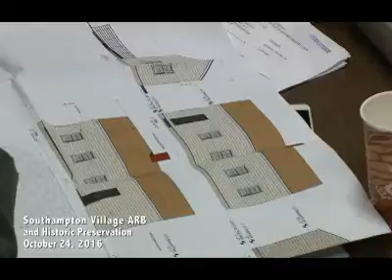It does not conform to current zoning. So we're looking to go before the ZBA on the 17th of November to address variances for, I believe it's 116 11.1, which has to do with the setback from the front of the property. The existing structure was built 3 feet 3 inches closer to the road than it would to conform to current zoning. So we're going to seek relief for that.

And the second thing we're seeking relief for is 116, I think it's 11.0, which has to do with the gross floor area because it's such a small building. But this indeed was the primary structure. This was the house. None of that gets grandfathered, huh?

We're just trying to dot the I's and cross the T's. You know, I have my own opinion about what you just said, and I would agree with you. Bo doesn't look like he would agree with that. It sort of morphed into a bigger house over the years, and when it was demolished, it wasn't 600 feet. It was a larger one.

Much larger. So if you want to go back to the original, I think the minimum for the gross floor area is 800 square feet. Yes, it is. So it's actually below the minimum. That's what the issue is. But the structure that was demolished conformed to the minimum. Yes, it did. And it was always the primary residence. It was not a secondary residence or secondary structure.

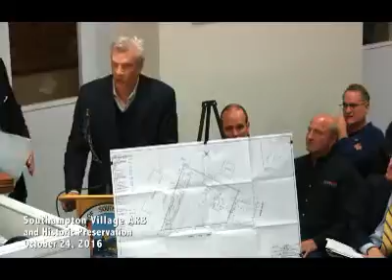Proceed. Good evening, board members. Wayne Bruyn, O'Shea, Marcincuk & Bruyn, Southampton, New York, on behalf of the applicant, Hamptons HDA LLC. With us in the audience is August Dorenzo and James Dorenzo, the principals of the company. We also have Michael Mineta, our architect, who will make a presentation for you, Joe Lombardi of the Raynor Group, who is our site engineer, and Steve Narada of Aris Design.

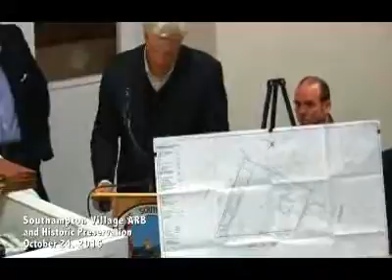The property in question is 116 North Sea Road, on the corner of North Sea Road and Bowden Square. It's a 1-acre lot. In 2014, an updated certificate of occupancy was issued, and the survey is right here. Existing conditions: it is improved with a dwelling. The certificate of occupancy issued to our client upon his purchase shows the property improved with a 2-story, 2-family dwelling, a valid pre-existing non-conforming accessory barn with business retail use, and two accessory sheds, with approved parking on site.

I can just point that out. This portion right here, the shaded portion on the northerly part of the property, this is Schmidt's on North Sea Road, Bowden Square, and the existing dwelling.

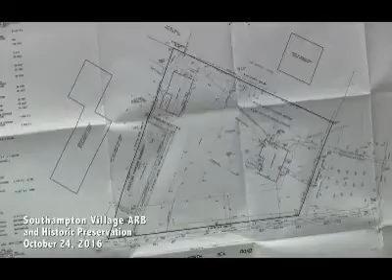We're here tonight for a preliminary discussion and to get this board's input on a preliminary basis. We've been to the planning board — in June we had our pre-submission there, and the planning board issued a report and some design guidelines that we need to address. One of the issues they asked us to look at specifically is the historic significance of the existing structures on the site, and whether they are contributing structures in the district. As you know, we are within the historic district.

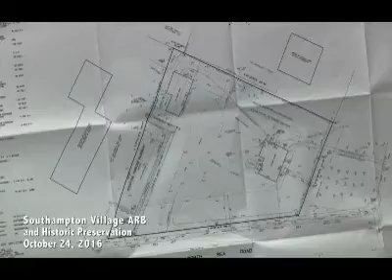Front along Bowden Square, all sides, details, and so forth — we've taken that into account. In studying the building architecturally and in terms of planning, we can go over the details, but the building itself — we wanted it to fit in architecturally and to be an iconic piece of the architecture of Southampton.

We looked at probably one of your best buildings within the town, the Southampton Historical Museum, Rogers Mansion. We looked at some of the elements there — two-story buildings, flat roofs, detail, octagonal additions, balustrades, and so forth — and considered how we could use that within our design while keeping the existing architecture intact.

With that said, this is the initial sketch of the feeling of the house — how it would be restored and how it would be added to. You can just barely start to see the additions in the rear, so from Bowden Square it will feel very much in keeping with what it is today. The house itself, or the new structure, will screen the parking areas in the rear.

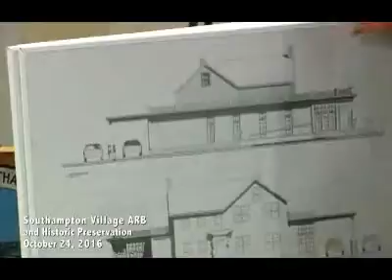Front and rear elevations: the house is kept intact, with the cupola on top as the main architectural detail besides its double-hung windows, and all chimneys kept intact. There's an addition to the left rear, and an addition to the right rear with a drive-up window. The main entrance to the new structure now comes off of North Sea Road, while the front entrance will only be used as an emergency access from inside.

So to be clear, the cars are going through a drive-in window and an ATM? Yes. No, I just want to make sure that what I'm seeing is what I'm seeing. Yes, there's an ATM lobby and a drive-up window and a drive-up ATM on the east side of the plan.

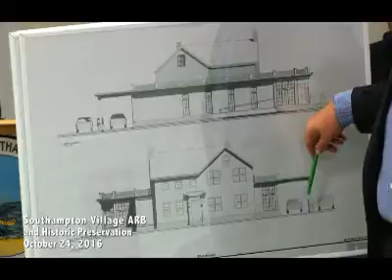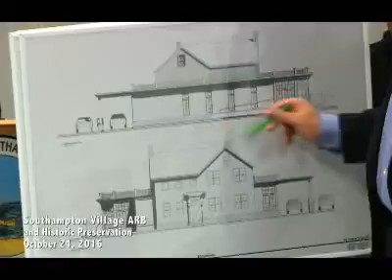The rear of the building, there is no rear of the building. We're looking at this as being a four-sided piece of architecture and not a blank slate in the rear of the building. So this is important to us, details, and so forth and so on.

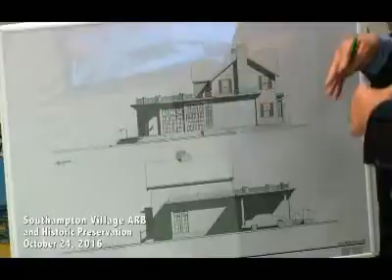When you talked about North Sea Road in the way of elevation, running out of space on this, this is what you'd see from North Sea Road. So basically the house is kept intact. In front of this is what's protruding in the rear is the entrance to the new proposed bank branch, and a similar octagonal element that you see on the museum which was a sunroom on the museum, with the balustrades and the details and the segmenting of the pilasters around that element.

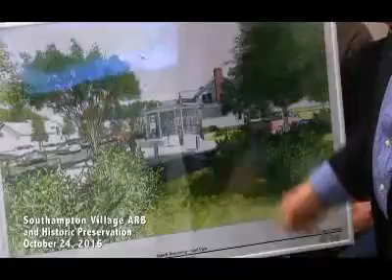That sketch, I'm running out of space, that you just questioned was of what you would see from North Sea Road, here. Thank you. And you can see the house, the existing house in the background preserved, and the addition, the parking, the barn, and in that packet we have landscape plans, we have material boards at the end.

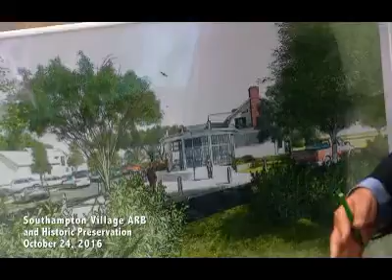We just realized that we'd be here an hour if we do everything in detail, so we really watered this down for the presentation. Any questions?

I'm going to reserve mine until I find out what we're looking at in terms of the original building, because that's going to... there is a plan that is. I can pull one out. As I was stating, it's going to guide my direction in terms of what you're proposing.

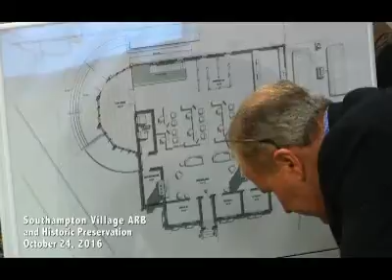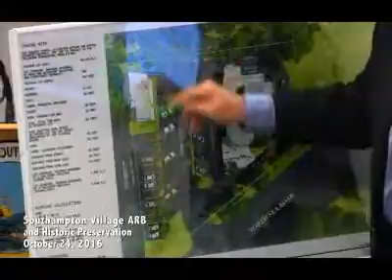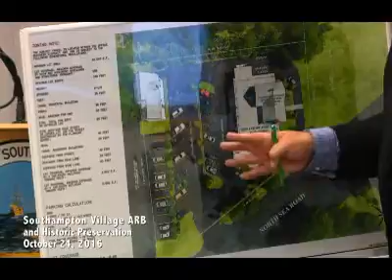And there on the site plan, which was the first one we showed you, there are calculations that will tell you the amount of existing square footage and the amount of what was added. And all this is within the guidelines of the code, zoning, and all the setbacks and so forth are meeting that. So we're not looking for any variances or so forth. It's purely ARB.

By the way, all the lighting in the back, we have fixture types that will show you in keeping with the architecture. Anything in the front of the building will be kept low, ground lighting. You can see that in the photographs. So it's really an all-encompassing plan architecturally.

Jeff, any comments? Not at the moment, I'd like to come back after you have a chance, Curtis. Christine? Not at the moment. I'm waiting to hear from Zach.

Okay, it's very important that we, I question, I challenge the notion that this is not a contributing structure in the historic district visually, and if it's not, it should be. I would want Zach to come back and give much more of a presentation with regards to its history before we start peeling back or adding anything to this.

And if it is, then the level of addition you do to it would have to adhere to what has been drafted specifically in our historic guidelines with regards to downsizing, creating a more recessive addition rather than what you're doing there. It seems like you're putting a lot around the overall structure, and it may change the architecture to a degree where I think now you've lost the entire intent and design and features of the original building itself.

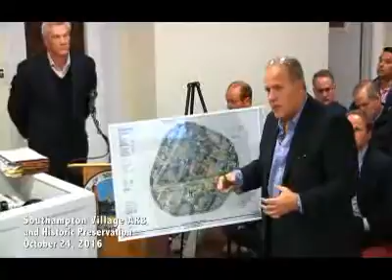Even with that in play, because we were not informed that might be a situation, we felt that the architecture we've created was not to just add square footage around the building, but to add and embellish the architecture in a neoclassical way, in keeping with the town of Southampton. Nothing was looked at apart from the whole, to become a gateway, an iconic building to Southampton, not a modernist structure or something totally dismantled.

Now, the existing house itself has been changed over the years, so it would be very interesting to know what the historical nature of the existing house was. You're basing that on... do you have information on any additions, any alterations?

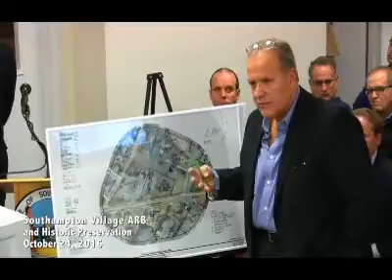Well, we can see in the construction that a lot of alterations were done and made to the structure. We've looked into... Augie, you know the age of the building.

Mr. Dorenzo is the owner. You would have to come forward because we cannot hear you. Well, the history, the age of the building. You have to move forward closer, sir. Yeah, I'm not sure of the age of the building, but closer. Closer. Mic right there. I can't give you the answer to that, but the building itself.

We're trying to celebrate the building itself as far as keeping the home structure as part of the development. We're not looking at coming up with a design that's not in keeping.

You're celebrating the structure by putting drive-through tellers in? No, that's not the structure. The drive-through is not — we're adding to the structure. I understand, okay, I didn't answer your question. You asked me, I just want to know the age of it. If you don't know, we'll find out.

I think what Mr. Dorenzo said, celebrating the structure, is that whether it's a drive-through or a covered canopy where horse-drawn carriages were brought in — there are canopies, there are balustrades that were done. I think that's why we looked at the Historical Museum for that. There are usages where covered canopies are used, obviously not for ATMs, but we used the architecture that celebrated that type of covered use that was outside.

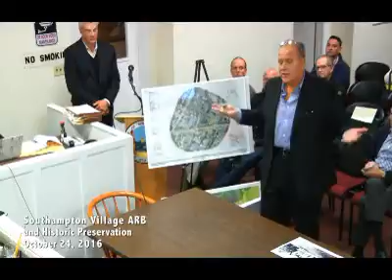What we'll do now, if you're finished with your presentation, is see if there's anything further you want to add. No, this is the initial presentation. It was to get your feedback, so we did not go forward and give you a set of construction documents and then have you tell us you'd like to see change. Understood. So we're looking for that feedback and we welcome it.

Well, then if I may, let me build on what Curtis was saying — that the changes you wish to make, while positioned in the context of preserving the original house, to a great extent add to and change the very nature of that house within that neighborhood. And that corner, Bowden Square, is one of the last vestiges of the town at an earlier age. So the additions you're making, I think, change the entire complexity of that particular corner.

I think it's going to be awfully challenging to do what you say you're doing, which is to preserve the integrity of a historic house. We can parse words, as was said before, as to what deems historic, but there's a sensory level of what historic is, and as you presented it to me, the historic nature is lost in what you're proposing. Beyond that, I'll wait to hear from Zach, but I think it's a challenging road to hoe.

Anything else? No. Any public comment on the application? Please step forward.

My name is John Bennett, and I own the building at 212 Windmill Lane, Southampton, right across the street, pretty much in sight. I have no objection to the size of the building, nor its use. The site plan, that'll be up to the planning board, but it certainly appears the ingress and egress off of North Sea Road is appropriate.

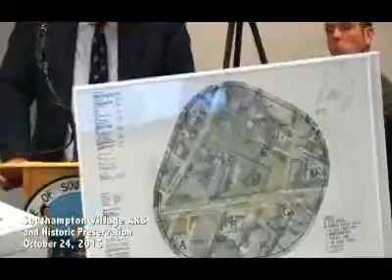So, for example, the proposed glass addition on the front, I think just looks like a suburban office building atrium. And in terms of compatibility, it just doesn't look like the sunroom to a residential structure, which is presumably what they're trying to mimic here.

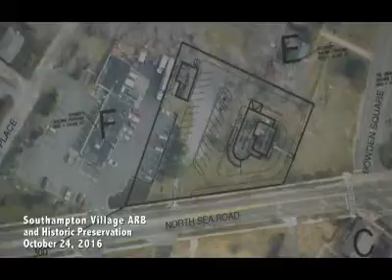The B&B did a very nice addition to that - was the old Durian Baird building, where the entrance is rectangular. And if you look at the Mercator Cooper House, similar - the sunroom is rectangular. This is octagonal, and it's true the Rogers House does have like an interrupted octagonal southerly entrance, and then off to the side there's a sunroom.

But there's as much wood as glass in those two treatments. For example, I think on both of them, certainly on the entrance, the mullions are very heavy, and the panes of glass are interrupted by - some people might call them columns, but I think they're pilasters because they blend into the actual building. So you see as much wood as glass. This looks more like a suburban Long Island attempt, which is certainly what we don't want.

Again, I don't have any problem with the use or the size of the property, but I think something has to be - the pencils have to be sharpened more. You have to take a look at the actual treatments here.

I would certainly hope that they would be willing to place a cedar shingle roof on the property. B&B has it, I have it. My roof is both cedar shingle and standing seam copper. Very expensive, but it shows my belief in the area, and certainly that was something that could be done.

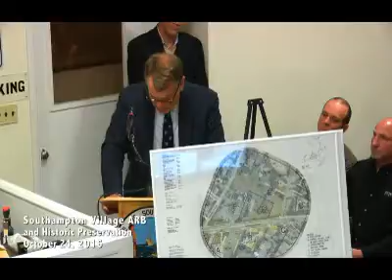One of the things that becomes a cost factor on these cedar shingle roofs as much as anything is we have a lot of different valleys and everything. It's pretty much straight runs on that building, so I would hope they would consider that.

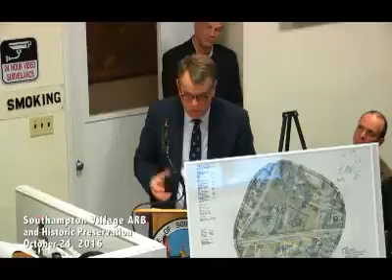That picket fence has been there for a long time, part of the fabric. Obviously you have to have ingress and egress on North Sea Road, but hopefully they'd be able to preserve as much of that as possible because that's the real part of the sense of place there.

Again, just a minor note - that trellis effect over the south entranceway just seems busy and unnecessary and superfluous. On the south entrance to this building, there's a trellis that comes out. It looks like it's tried to attempt like an arbor look over the trellis. It just seems unnecessary.

No, it's on the southerly entrance. So again, I'm happy that someone is willing to put money into the house and into the area and redevelop it. But I think you want to make sure that since the use is going to be changed, the attempt is as much as possible to mimic a true residential design.

And Mr. Broadley is right, it's going to be a challenge, but I think it's doable. Well, don't we first have to find out what era this is? I think it's either - I hate to say it, but it's either on the list or it isn't.

No, but it's a simpler house than the ones with the sunroom. This house is more pedestrian in a certain way, vernacular. Yes, it is. And so, until we discover when and how it was, who was there - I think someone important lived there actually - we would have to make a determination after that as to what's appropriate.

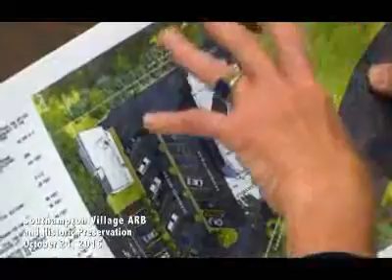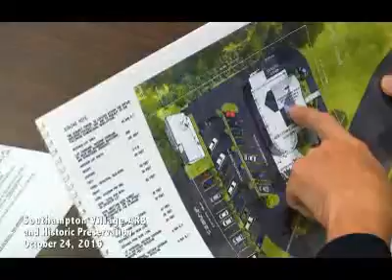But this conversion requires removal of the internal second floor, so the existing two-story house is being gutted from the floor to the attic, for some reason I'm not quite sure about. And the footprint goes from an existing 1,200 square feet and change, with an addition of 2,200 more. So we're nearly tripling the footprint of this house.

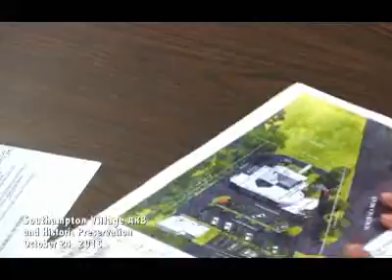To me, it's not about the bank. To me, this is an unconscionable expansion of this house, which our code addresses from time to time when people want to enlarge their homes and make them three times the size of what they already are—and that's often something we take a dim view of.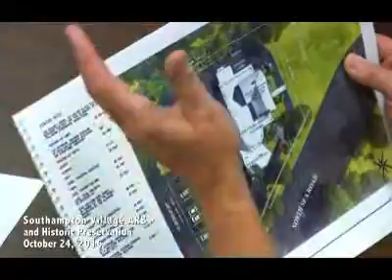I'm also worried about paving the entire site. All that's left is about 3 or 4 feet around the edge for a little bit of grass and some bushes to grow—the entire thing is paved. I think the word suburban was used. This, to me, is a suburban transformation of this farmhouse on the outskirts of the village. I don't think it's...

Let's find out what it is first. I understand, but whether the house was built in the 18th century, the 19th century, or the early 20th century, if it's contributing, it doesn't really matter. That's a detail—I'm just looking at the vision. I understand. The vision of this property is out of keeping for where it is and what it is.

As it's presented here, perhaps it could be scaled back. Well, we have teeth in the historic district. Yes, even more teeth if it's contributing. Correct, so that's the reason why it's important to know. Right, I just haven't seen this yet. Okay.

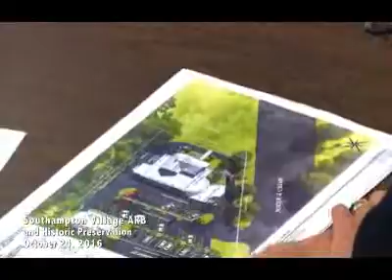Anything further from the public? Anything further from the applicant?

I just want to remind the board that we are in the office district zone. The village board has recently—if you haven't reviewed it, you should—conducted the North Sea Road study, which our clients have looked at with much interest. This is office district. If you look at the table of use regulations, and if this board is going to try to help promote, with the rest of the village, the reuse of buildings of a certain fabric or otherwise, they need to look at what those uses are. Right now, when you look at what could be the highest and best use of this property, which is one of my client's goals here, and what he can do...

It's amazing that his first proposal here was just not to demolish it and come in with a new building, which is what you see directly across the street and on the west side of the road, directly opposite this, where the Gold Coast Bank is. Right now it was doctor's offices, that brick building—that's essentially directly across the street.

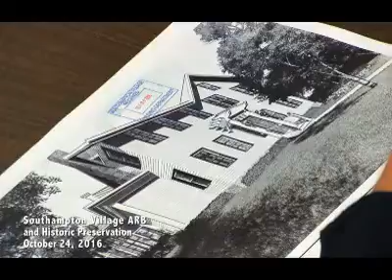So when we start looking at the fabric of what North Sea Road is, with Schmidt's being right next door, we have some elements that we need to deal with. The North Sea Road study was trying to provide incentives where there might be other uses we could put these properties to. But right now, you're limited to three or four office uses to try to make something productive out of these properties. That's sort of why the village board started that study along North Sea Road, because that area has stagnated—there hasn't been uses, there haven't been any conversions, and it was a way to provide incentives for landowners to do what you want to do, and do it in a design.

Nonetheless, we hope you can review this and get us your input. We're at an early stage. Like I said, the planning board has looked at the site plan. They've given us a number of comments, not dissimilar to what we've heard tonight as far as the site is concerned. There are some elements we need to address, and certainly they asked us to approach your board to get input, at least on the historic aspect and the design. So as soon as you can provide that to us, that would be very helpful.

Very good, thank you. In past times, I recall—not that we have much input—but we sat in joint conversation with the post office.

Maybe this is the post office. Well, we did have a conversation, but didn't get very far with the design. It used to be... it came in as an aluminum building originally, if you recall, almost like a hangar style building. Then we had them add some type of fabric to the building itself. Not a lot, but at the meeting I was basically told we had to do what we had to do.

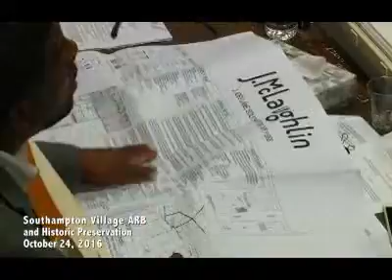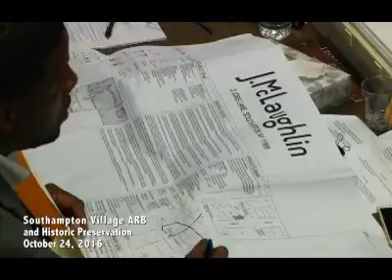One thing that did not show up on the elevations is that we are going to be painting the doors to match the colors of the awnings, which was in the signage painting proposal. The doors, what color? The same color as the awnings. Turquoise? Yes, they're turquoise, but it's the same as the awning. Yeah, the door color would match the awning color.

And the doors, new, are white now? What color are the doors now? The J. McLaughlin door right now is like a bright orange, and the space right next to it is like a natural dark cherry stain.

So turquoise, is that what's in his photos, what you're proposing? No, it was in the sign, the previous sign package application. Well, if you look at the elevations, you can see the color.

And the doors are in a recessed vestibule, so we thought it's not going to be too... Is this what you want to color the door? Correct.

I think it's a little busy, just me personally. If your awnings are turquoise, that's your style, I'm sure it's within keeping with probably the overall design and mission of the company as a whole. I may have an issue with it being too much.

Brian? I don't. It's recessed back in, it's hard to see, and I think it ties it all together. You're telling me this is going to be hard to see? Well, it's orange now, and I walk past there every day, and I didn't remember approving the orange. Well, orange too, you can barely see the orange. It's about the same color as your vest, probably.

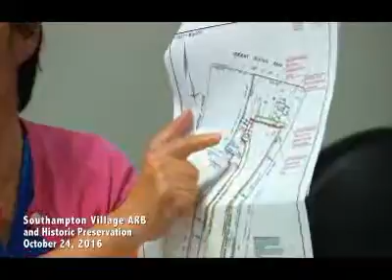And the existing screened-in porch, she converted into heated living space. So basically this building went through many changes. It really doesn't retain any historic value.

You haven't documented the dates of these additions? This addition was done after 1975, but I don't have a specific date. The homeowner here can tell you if you really want to know. The existing portion of the house is about 25 feet by 25 feet.

The house has a block foundation, very short, and you can see a lot of water staining. The framing members are very small. The inside of the house is also quite dilapidated. In my opinion there's really no architectural value or historic value. It should be a non-contributing structure.

I'm wondering why this slipped through. Usually I go out and do a quick check for pre-1926. Would you do it outside of the historic district if dated? That would actually trigger it, but because it's within the district, I think that's why the code was passed to canvass those buildings that, for whatever reason, were not included in the survey back in 1979, but now have potential interest.

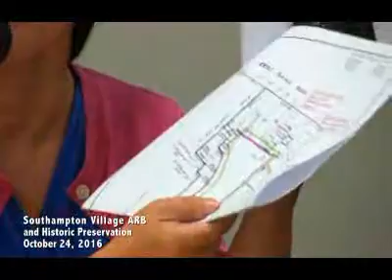We don't know what's going to be put in its place, but if you look at the survey, you can see the addition is actually bigger than the original house. And if you look at the photograph, you can see the look of it is completely different. Inside and outside, really, I couldn't find anything that's striking.

Christine, comments? No. Any public comment on the application? At this time, we're going to hold over the application so that our historic consultant can do a report, come back and give a recommendation and his summary of what he's found and been able to uncover. Next meeting, the 14th? Any comments? Any questions? Okay.

Well, yes, I thought it was built in 1930. You would have to, if you want this to be part of the record, you would have to come forward.

I'm sorry. I have permits for everything, and I did something to the house. Your name, just for the record, ma'am? Justine Corbin. And about every four years, when I collected more money...

It is pre-existing, non-conforming, and I have been before the board every time I wanted to do an addition, every time. And I tried to have a better driveway, and I had a terrible time, so I gave up. All I can say is I love the house, but I'm having trouble climbing the stairs, and it's time.

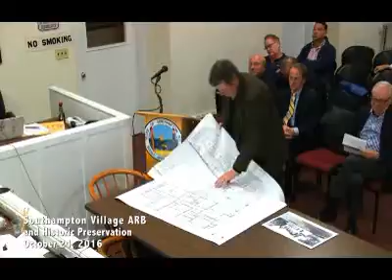Do you have small plans? Maybe, I hope so, yes, he has something in hand. Are you okay? Like me, quite an evening. It's like me a couple of weeks ago.

Good evening, John Laddie, architect for the owner. I'm here before you tonight because we'd like to add an additional roof deck to my client's house. This house was approved by your board about a year ago, and we're currently under construction. We think a roof deck would be very much in keeping with the architecture, and it would help enhance its presence on the site, and give my client an opportunity to look out at the water to the south. This is a picture of the house as it's being built, as per the drawings, front and back. And I provided you with a drawing of what the rail might look like.

I didn't see a set of site plan or survey in here. I apologize, I didn't bring a survey because that survey hadn't changed, it was just a roof deck, but I could adjourn to get it for you. Just so the application is complete, and obviously we're looking at a number of things, one of which would be privacy issues, line of sight.

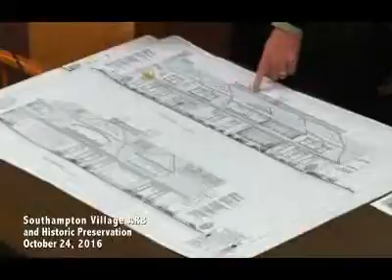The deck would be about 586 square feet, and it's about 19 feet deep at its deepest, 11 at its shallowest, and would go about 43 feet along the roof line. As you can see, it goes from ridge to ridge. This portion is not part of the roof deck—we just wanted to keep the solar panels behind this, and keep the aesthetic of the symmetry of the gables.

Where is it on here? Is it the white? No, it's the dark part. This part? That's correct, yes.

The application is incomplete, I think we need to have a site plan and a survey on file, just so we don't set any precedent moving forward. However, it may just be being able to see what your distance is and being able to determine what that distance is and projecting what the line of sight would be. I understand your neighbor may or may not have, however, we're judging and reviewing and looking at your application independently.

Brian, any comments? Jeff, any comments? Yeah, I personally think that for the sake of a view of the ocean, you're sacrificing the attractiveness of what otherwise is a very attractive house. I think it changes the look, the scale of that house. You mentioned the neighbor who has a roof deck—that's diminutive by comparison to the house, and it fits that particular roof style. This looks, to me, as if it's just been plunked on, and quite honestly, I do think it takes away from the house.

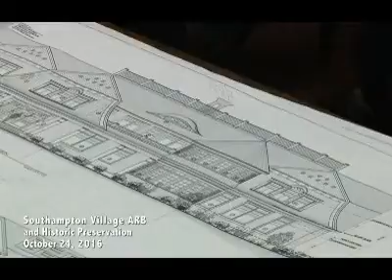Our concerns have to do with privacy. Well, I think it's kind of in keeping with some of the neighbors in the area. I drove around, and my client loved this Keene house. It's got a big roof deck on it, but the roof is smaller.

So what you're proposing, these two roof decks are definitely smaller than the one I'm proposing. Sure. There's a house on Christopher Street with a smaller lot, smaller house, smaller roof deck, but nonetheless there's a precedent. There's one here on Old Town, very pretty, but again, they wouldn't let me access that one.

I just briefly drove around the village and found roof decks from all over, even from different time periods. That's a good point, because some of them were allowed, but they were not supposed to be accessible, supposed to be decorative. What happens after the home goes up, we have no idea, unfortunately.

Very well. Any public comments on the application? Nothing. Okay, nothing further from the board? No. All right, so there are a few items you still need for the site plan. Anything you can bring back before this board to help those that may have some issues?

Yes, I'll do that. Visually make it more conforming, or take into consideration some of the comments, and maybe do an alteration to the size or dimension of the deck. It's your discretion. Thank you very much.

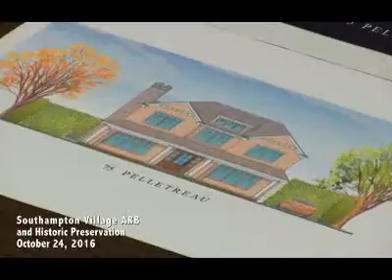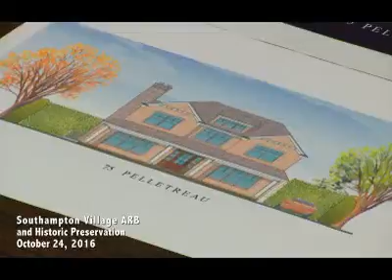Do you have a second rendering? Yes. And the plans that represent that were dated and received on the 19th? Yes, that shows the change. That's it.

Very good. Board members, any questions? No, better, much improved, much better. Jeff? No, it's an improvement from the last design. Any public comment on the application?

Motion to approve? I make a motion that we approve the application of J&J Realty of Southampton on Pelletreau Street. Second? All in favor? Aye.

Thank you. Did they show the pool cabana? Wait a minute—we did that last time, we didn't have an issue. Oh okay, it's not on there—just the front elevation of the problems. Here, some more.

Next application. Next application's Ryan Mollett, 91 Lewis Street. Good evening, Jose Jimenez for Arthur Fraser, architect and planner.

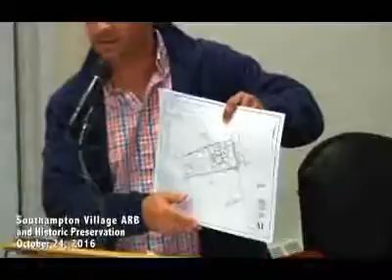We're proposing a rear addition, a small addition to the back of the house. Since the last meeting, we became aware that the original house, this portion, was built in 1916, which is historic. Then in 2003 another addition to the house was built. What we're proposing is an addition to the back, basically a family room with a covered porch, and a second floor for a master suite, master bedroom.

The addition is proposed to be set back from the rear portion of the house, so it's not going to be visible from the street.

If you go to page A4, you'll see the existing north elevation. Pick that up so the camera can pick up what you're looking at, please. Allow the camera to zoom in on that.

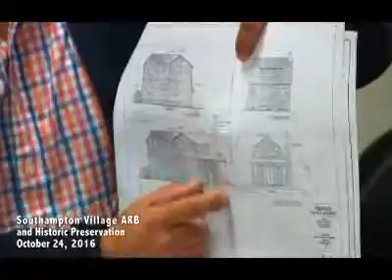If you go to A4, you'll see the existing north and the proposed north, which shows the rear addition. The west, the existing west, which is the back, and the proposed addition, which is a gambrel addition to the back of the house, just like the rest of the house.

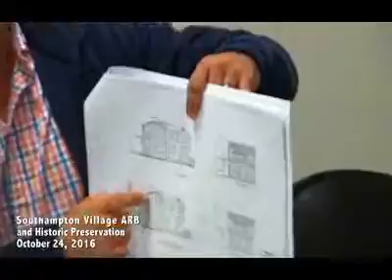And if you go to A5, on the south elevation, there's currently a chimney that sticks above the roof of this existing gambrel. The chimney is going to be demolished, and it's going to be rebuilt on the back. It's going to have pretty much the same relationship that it currently has.

If you go to the front, which is the east and the proposed east, all you're going to see is the 3 feet of the chimney sticking above the roof line. But the front will remain the same.

There are changes to the interior layout of the house, but all the windows are going to remain. All the existing windows are going to stay in place. Nothing's going to be changed.

Jose Jimenez, J-I-M-E-N-E-Z.

So what you have shaded is existing. What you have lighter, with regards to the roof, that's what you're proposing, correct? And what's the total square footage that you're proposing?

Total square footage... 876 square feet. No, hold on a second. I'm sorry, 470 square feet, including the porch, including the covered porch. That's the proposed addition, the footprint. Correct.

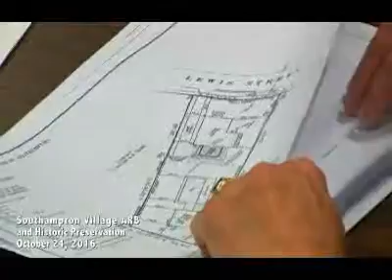I'm a little confused by something. Existing house... it says, oh, I misread. Proposed second floor, but then it says family room with bedroom above, but that's contained within the 2 floors. Correct. Gotcha, not reading it right. For me, the challenge was this was a very modest house to begin with.

Right, and it was substantially increased in size. And now this is sort of stage 2 of that. The additive impact is still with reference to the original modest house, which, if all of this were proposed as one piece, I think would have presented a big challenge in terms of the scale of what's being proposed relative to the existing, et cetera.

Because remember, this is not in the historic district. This is listed on the National Register. This is in the Lewis Street expansion area, and it's a contributing resource in that area. So I understand that this isn't being brought to you as one project, but in fact, the additive impact is to end up with a structure which is virtually 4 times the size of the original. So that's what results from this.

I think any project, if it comes in more than one stage, kind of misrepresents things. This was not the intention. This is a separate owner. Several years have gone by, so it's not the same owner. They're dealing with an existing house, and now they're coming in to enlarge it.

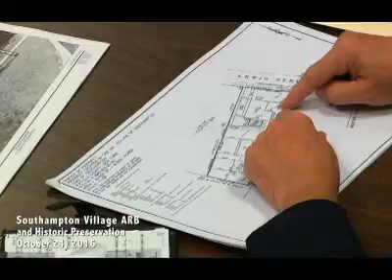But historically, the bigger picture is that you're ending up with a house which is more than 3 times the size of the original, by my rough calculations. I think by stepping that addition in, which it wasn't before, it wasn't before, also wider. Correct.

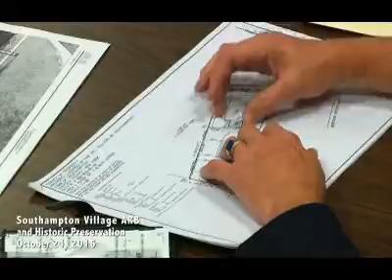So I think a sincere effort has been made to minimize the impact of that by removing that garage idea entirely, and then stepping that back addition in on both sides so that it will be difficult to see. It won't be entirely out of sight, but it'll be less of an impact on the street.

Zach, so your report that you wrote was for a previous design? Yes, correct. The garage was still there, infilling the front facade, bringing that to a total straight across, including the garage. And the back extension was larger, as I recall. Correct, much larger.

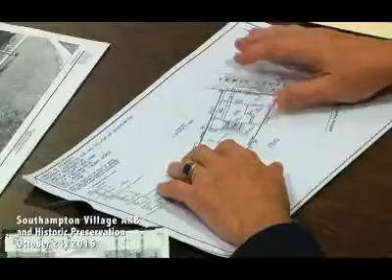I mean, this is probably half in terms of enclosed living space. What you're proposing now is about half of what you were proposing before. Correct, because there was living space above the garage, all of which is now gone, and that had a major negative visual impact facing the street. And the back extension also appears considerably smaller, so this is a much restrained version of that.

Architecturally, what you're proposing is more in keeping with the original house than the first addition, which had a very awkward bad gambrel stretch. But that's what exists, that's not his responsibility. So in a way, this almost tones that down.

Brian, anything further? No, I think architecturally it's very successful, and the impact on the street is nothing really. Christine? Definitely better. Susan? I agree. Jeff? Same here. Looking at the two surveys, it's night and day - the proof is in the pudding. Comparing the overall additions, you've reduced it by close to half. I'm in favor of any reduction that helps the streetscape.

Any public comment on the application before we move forward? Anything further from the board? It doesn't seem there's any opposition. We'll proceed for a motion to approve. Motion to approve the application of Ryan Mullet on Lewis Street. Second. All in favor? Aye. Thank you very much.

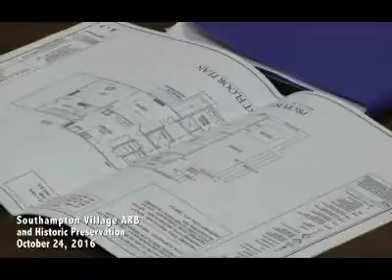Following Zach's review, we had him go and do a report since it is a contributing structure in one of the national registries. We wanted to have him indicate on record the nature of the existing structure and the additions, finding them to be in keeping and not detracting from any existing historic significance or architectural features. In doing so, I don't have any further issues with the additions.

Christine? No. Jeff? Nope. Susan? No. Any public comment on the application? All right, motion to approve. Motion that we approve the application of Susan Zakalak on 75 Lewis Street. Second? All in favor? Aye. Thank you, good night, good night.

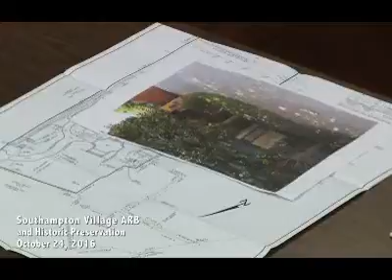It's very much a bunker type of scene. The other thing is you mentioned there's a walkway. My experience trying to go down Squabble Lane during the summer on a bike is that I was stopped before I could even get down that street, so I don't know who's accessing the beach other than your client's neighbors. I could be totally wrong on that, but...

Well, it's a public right-of-way easement. Well, it's a public right-of-way. Is it for the entire public? No, it's not public—it's a private right-of-way for the people who live in that neighborhood community.

Right, is that correct? Yeah. So they don't all live behind a gate. So putting all that together, the gate's a non-starter for me. The gate and the guardhouse is just over-the-top non-starter.

So we would be in favor of your guardhouse, but you would not get an approval with the gate as proposed. I don't know, you would have to mention that back to your applicant. I don't know if you want to keep the application open so you can discuss that with him or her.

What that would mean is we would not have an approval, and therefore you would not have a Certificate of Appropriateness for the gate. I see, so they're not separate? They're not treated separately, but you have one application for both.

Any public comment on the application? Can I ask one question? Sure. Would I have to come back with plans to redesign the gate in order for the other to be approved?

Correct. Are you familiar with the board's view of gates in terms of transparency? I've read the documents that you have available. Sure, they're very clear. If you go with 50%, you can't go wrong.

Right, let's see through that one, just flip-flopped. Yes. Okay, so in other words, if we like one, we have to like the other. I like this one, actually I like this one better. Brian, any questions? No. Jeff? No, and this one is a little less heavy than the previous one. Susan? I like that one better, but yes. Christine? I think it's great.

Any public comment on the application? Motion to approve. I make a motion that we approve Old Town SH Associates LLC, the gates at 6 Old Town Lane. Second. All in favor? Fine, aye. Good luck, thank you very much.

Next application please. Next application is Allie Tamson, Meeting House Lane.

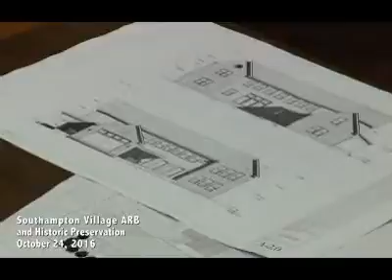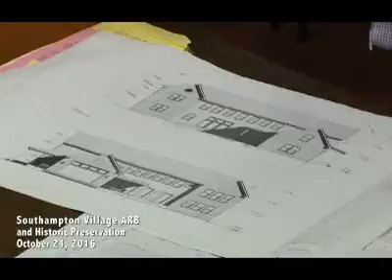Okay. This is a new house on a vacant lot on 111 Bailey Road, the edge of the village, open farm field, a two-story residence with a finished basement, board and batten siding and clapboard siding, all white with black windows. It's made up of a bunch of gables for the most part. There's one small wraparound area on the side that's a hip, one-story hip.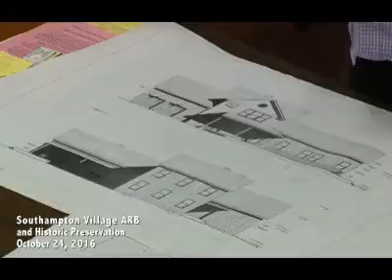You say black windows? Black windows, yes. So you have the wood, the cedar finish front porch. Correct. You have the same detail around the front doorway. Correct. You have the cedar roof. Yes. White vertical clapboard - and horizontal clapboard. Horizontal, I'm sorry. And then vertical you have board and batten, black windows. Vertical board and batten and horizontal clapboard. Clapboard would always be, of course, horizontal.

Seems to be a popular trend these days, white houses with black windows. We're starting to see them all over the place.

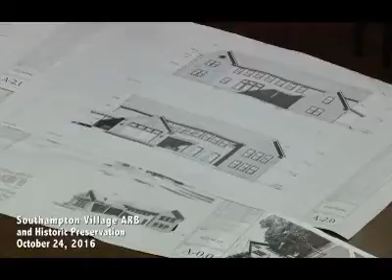Survey, where is it? Survey's in here. Here you go. Here is the site plan. There was a requirement in the code, as you probably know better than me, to block the parking, so we've called out arborvitaes at the street. Other than that, we don't have a landscape plan up to this point. Okay.

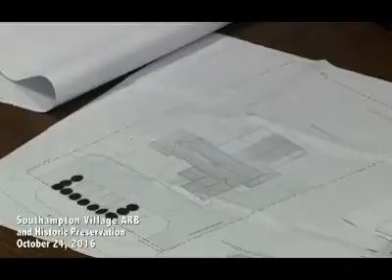Is that chimney code? You see the rear? You see it? It looks like it's below the roof line. The code in terms of the minimum distance from the roof in order to conform? I know, that has nothing to do with it. Yeah, that helps. Well, which is it? No, this is just a perspective. Yeah, that's the elevation. It's so much better when you see it 3D or perspective.

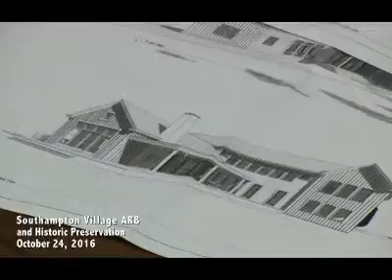Jeff, what are your comments? It's an intriguing house. The difficulty with that street is there's a collection of houses. There are three little cute ones. They're gorgeous. Yeah, they're cute. They are, I love them. And so you've got those.

Why are those? Those are his. Really? Yeah, yes, Force house. I didn't know that. I didn't know that. They are as cute as can be. Thank you. And there you go.

And yet at the far end, the dead end of Bailey, there's a contemporary house, and then there's some old little, probably farmhand houses and cottages. So it's a hard one, it's a mishmash. I could see this house on a bigger piece of property than that lot, and I know that lot is big for that street. Yes, but this is a barn-like house that would look great on 4 acres of land, but it's not. So I'm a little bit betwixt and between, so I'd like to hear the comments from the other folks.

I looked at that. Yeah, there you go. Brian? I mean, it's a contemporary farmhouse, stark white, nice and clean. Again, the issue is, does it fit in on that street, and what does fit in on that street? Yeah, it's a little bit of everything. Well, it's the beginning of the street, right? No, it's way towards the back, about 2/3 of the way down. It's next to... and the houses to the left and the right are not particularly artistic.

Is there any public comment? Okay. If you're going to do a house like this in the village, I think that is a good place to do it. Well, I guess I'm not reading - the fact that there's no public comment, one of which I know if there's an issue of real opposition, they probably would be here. I don't have any issue with the actual design of the house.

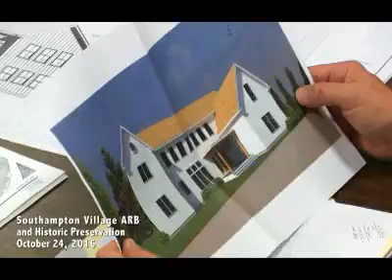I'm wondering how it's going to look with all of the pretty much appalling details. So you have cedar to black to white, it's just so many different elements. We have the cedar roof. Yeah, and the little bit of cedar trim around the entry. Other than that, the rest of the house is white. And then the black windows aren't like 8/8, they're just 2/2, so it's not a huge amount of grit, it's not a gritty black thing, it's just a delicate black line. It's a request of the client.

Yeah, no opposition of the board? No issues, no concerns? Susan? I have trouble with the horizontal and the vertical siding, along with the black windows. It just doesn't work for me. I find it to be stark, but not handsome, I guess is what I think. And I don't know really what to tell you other than that.

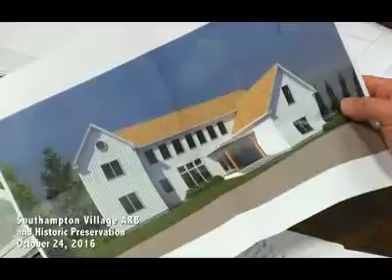It's not really unique, I'm telling you, it's not really going to play. I think it adds probably a certain amount of depth or interest to it, because if it was all vertical it would look like a barn, strictly like a barn. I think it gives a break. I'd go for the horizontal if I were doing it, because it makes it look so tall.

All right, well obviously I have the minority votes, you have 4, you have 4. Okay, so any public comment? All right, motion to approve. I make a motion that we approve the application at 111 Bailey Road, LLC. Second. All in favor? I feel privileged to have gotten through in one meeting.

This belongs to you guys. I did not bring it. Oh, okay, not stamped. There is one in the file. You have one? With many. We already started, happy to have it. Congratulations, thank you. And our last official application for this evening, Richard and Amy Miller. I'll be right back. Okay, you have small sets? We do have small sets, and the affidavits as well. Because there's additional information in here about materials.

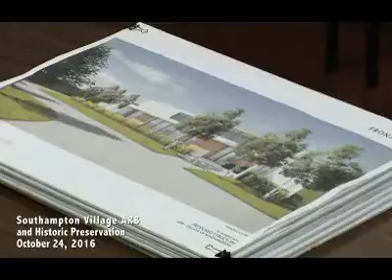Good evening, my name is Glenn Cordova, from Blaise McCoy Architecture, representing Richard and Amy Miller from 81 Downs Path. What we are proposing today is a 2-story structure composed primarily of stucco, a kind of off-white stucco, as well as Alaskan yellow cedar for feature walls which we would let naturally weather and silver out. The house is 25 feet 4 inches tall, and sits about 93 feet from the street. We are maintaining the existing hedge line across the street along the curbside. We do have a landscape plan in there as well. We are also proposing to move the curb cut a little further to the west of the property, so that when you enter and see through the gates, you're really seeing just greenery and not the house itself.

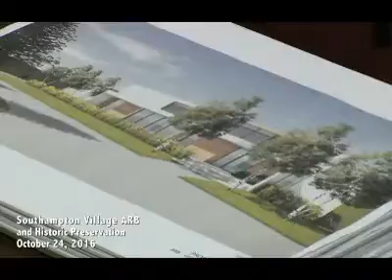Are there many contemporary homes downtown? Actually, the one that's on the site is contemporary, and we had done that. It was completed in 2014 at 211 Downs Path. Well, you look through the fence. Okay, but it's shingled, the cedar's contemporary. Cedar or shingled? The one that we did was white stucco. Oh, okay, but the one that's on the property. Oh, the one on the property is brown, yes, it's like a 1980s contemporary. Yeah, it's kind of run down.

There should be an image in there as well. See that? Black, white, and cedar. Black, white, and cedar. Yeah, I guess that's the design. Good thing. I like this one.

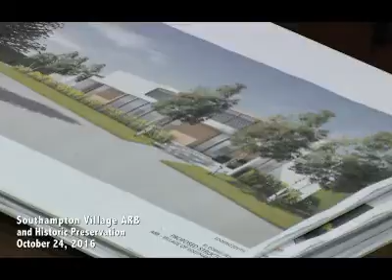It's a beautiful home, it's just a question. I know that there's a contemporary home there now, but it's probably older. I just question its ability to really be the first of its kind in this community. Well, again, we did finish a project at 211 Downs Path in 2014. It was a contemporary hybrid of sorts. It did have a pitched roof, but it had a significant flat roof as well. We added gates in late 2014. And the consensus of the board at the time was that Downs Path is kind of a mixture, it's very eclectic.

Total lot size is an acre and a half, 1.5 acres. So the parcel itself, you're really only going to see a portion of it because it's pretty... it's a very unique entry to the site too, because it's on an angle, so you really don't see it at all from the street side.

Brian, you have any comments? It's beautiful, really beautiful. Jeff? I think the house works on the site. Christine? I think it's beautiful, and I love the pale oak color, that's one of my favorite colors. Susan? I like it. Any public comment on the application?

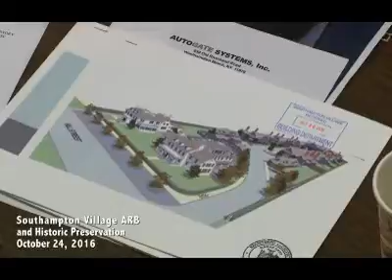Being that this was a hotel with 24 units, it was divided up, and a lot of the window arrangements are not original to this building. They were basically chopped up based on the room layouts on the interior. So we're going to eliminate some of those windows, regulating the size and shape, while preserving the overall integrity of the original design, which is a 5-bay main structure, 2-story, with 2 wings on either side.

The 2 wings on either side, at one point on the first floor, were covered porches that later were enclosed into the building. Again, the windows on these are not in line with the overall vocabulary of the building. In the proposed design, we are regulating that in line with the original portion of the building, which you can see in the proposed drawings, both on the south side and the east, west, and north elevations.

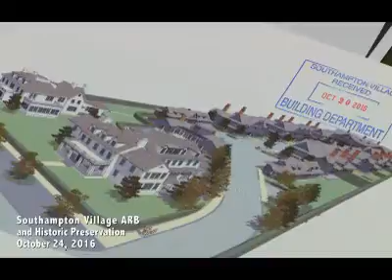A lot of the small porches are being removed. On the west side, we're proposing a new porch, and also on the south, on Hill Street, we're proposing a porch. This covered porch, even though it has a railing on the second floor, has no doors to that second floor porch - it's just decorative railing.

The three dormers are staying as is. On the wings, we're eliminating a lot of the ad hoc windows that were added, and again regulating it to a 2-bay per wing, as your drawings depict. And on the east side, we're introducing a 3-bay garage on the ground level of the building.

One of the entrances would be on Hill Street, and two would be on the east side, flanking either side of the garage. Right, I see that.

In the rear of the property, which is the north elevation, there is a shed dormer existing right now, and above it is a very handsome gable roof. We're using the vocabulary of that gable roof and providing a drop gable roof in place of the shed dormer, in the same vocabulary of the architecture, and scaling down the building on the north side.